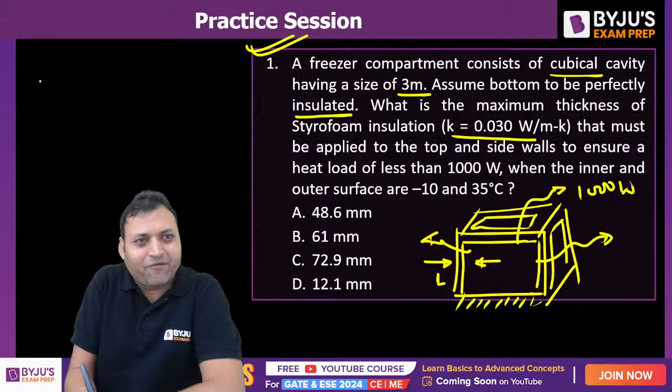The language of the question looks a little complicated, but the actual question is very simple. There is a cubical box, the bottom is insulated. Now we want the side walls to be insulated with styrofoam insulation, so what should be the thickness? Let me call the thickness L, so that the total heat loss should not be more than 1000 watt. If we want Q to be 1000 watt, then thermal conductivity of the insulation into the area available for conduction into delta T.

Delta T is equal to 35 minus (-10). Do not subtract 10 from 35 directly—it will be 35 minus minus 10, because the inner temperature is minus 10. So 1000 will be equal to thermal conductivity 0.03 into 5 into 3 square, do you agree? And 35 plus 10, that is 45, divided by L.

So we can find out the thickness. The only unknown is L. What is the answer? It comes to 60.75, so the right answer for this one is 61 mm.

Well done, Free Fire, Renil. Good, good, good, Bhavya, Kiran. Well done, guys, the answer to the first question is option B. Is this clear to all of you, those who have not responded through the comment section? I hope it is clear to everyone.

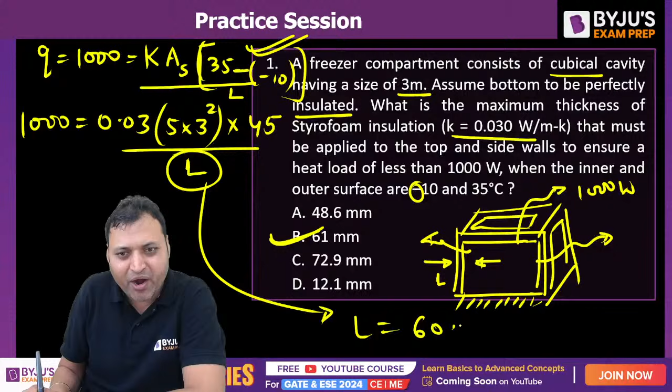The mode of heat transfer will be conduction. Only 5 faces are available for conduction, that is why the total area available for conduction is 5 multiplied by the side square, into the temperature difference between inside and outside, divided by the thickness of each wall, that is L. So L will come out to be 60.75 millimeters, and the correct answer or nearest option is option B.

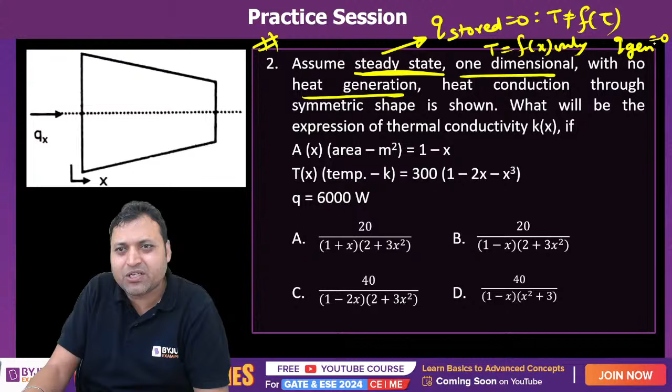When there is no heat generation and no heat storage, the rate of heat transfer remains constant. Heat conduction through the symmetrical shape is shown, so Qx will be constant. Do you agree? It will be constant because there is neither heat generation nor heat storage.

So what will be the expression of thermal conductivity? K will be a function of X. What will be the expression of thermal conductivity if the area, in meter square, is given by 1 minus X, and the temperature variation with X is given by this expression? The variation of temperature with X is cubic, and the variation of area is linear. So what will be the variation of thermal conductivity along the X direction? What is the answer to question number 2?

Can you solve it? One thing is pretty clear: the rate of heat transfer will remain constant using the energy conservation equation. Q in plus Q generated equals Q out plus Q stored. That is the basic energy conservation. If Q stored is 0 and Q generation is 0, then Q in equals Q out. The rate of heat transfer remains constant.

So Q is equal to minus K, which is a function of X, into A, which is a function of X, into dt by dx. Temperature is also a function of X. So first try to find out dt by dx. Can we find out dt by dx from here?

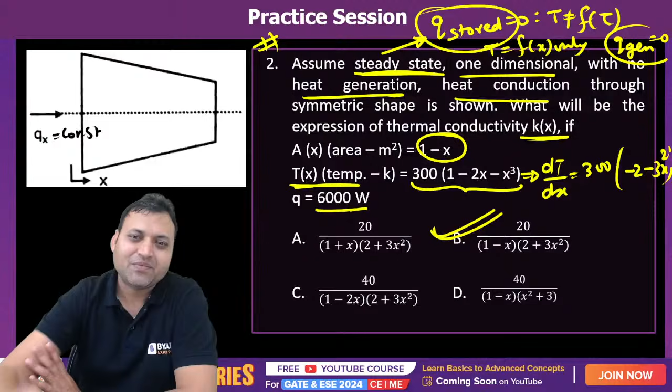How many of you had given the right answer? Yes, did you get it? Kenil, Free Fire, Kiran - good, good, good, good. Anybody having any doubt? Just let me know.

The first step is to understand that the rate of heat transfer will remain constant. Second is to apply Fourier's law. If we apply Fourier's law, then we can find out the expression for K.

Question number 3 and 4 are common data questions. Let us move to question number 3. At steady state, again, heat stored will be 0. Temperature distribution in a one-dimensional wall of thermal conductivity 50 watt per meter Kelvin and thickness 50 mm is observed. The temperature profile is parabolic in this case because of heat generation. Whenever there is heat generation in a plane wall, the temperature profile will be parabolic. If there is no heat generation and no heat stored, the temperature profile will be linear, but due to heat generation it becomes parabolic.

What is the meaning of heat generation? Any other form of energy getting converted into heat energy - that is heat generation. For example, chemical energy due to a chemical reaction can convert into heat energy, or due to nuclear reaction, nuclear energy gets converted into heat energy. In an electrical heater, electrical energy also gets converted into heat energy. These are some examples of heat generation.

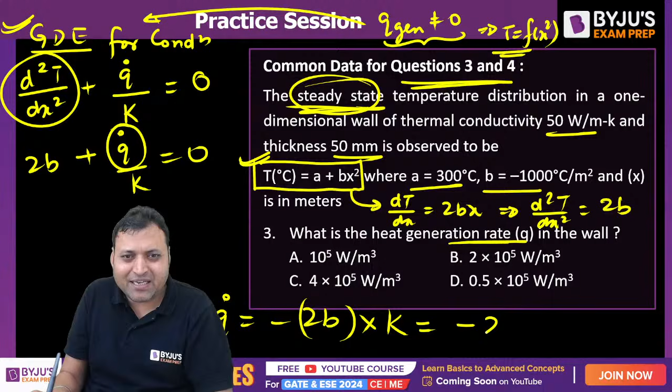B is equal to minus 1000 degrees Celsius per meter square multiplied by the thermal conductivity, that is 50 watt per meter Kelvin or per meter degree Celsius, one and the same thing. Either you write per meter Kelvin or per meter degree Celsius, it will be the same thing.

So the degree Celsius will be getting cancelled out with the degree Celsius. So watt per meter cube, it will be 50 into 2000, 100 into 1000. 100 into 1000, 10 to the power 5.

Yes, no one? Parth, well done. Shekhar, free fire. It is 10 to the power 5 watt per meter cube. Do you know, either we write the unit of thermal conductivity in watt per meter Kelvin or watt per meter degree Celsius, it will not make any difference.

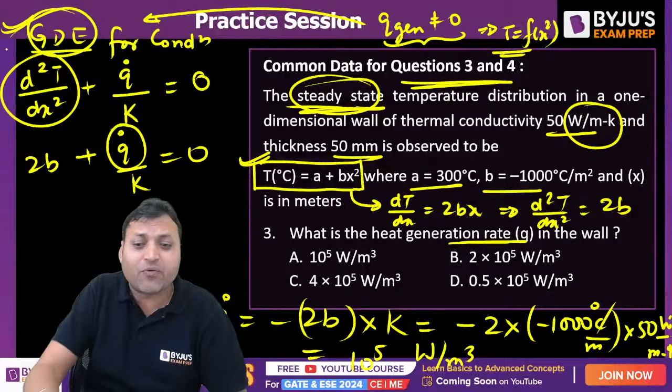Why have we used the governing differential equation here, and why had we utilized the Fourier law earlier? Do you know the difference? Whenever the heat transfer rate is constant, we can always analyze the system using the Fourier law.

But if the heat transfer rate is not constant, if it is variable, that will happen because of the generation of heat or the storage of heat or both. Then we should start our analysis with the governing differential equation for conduction, which is obtained by applying energy conservation for the system. I hope this is all clear to everyone.

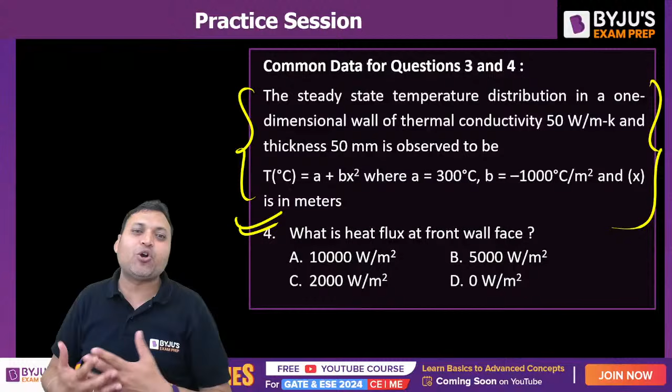Let us move to question number 4 using the same data. Can you find out the answer? Those who are not responding, let me tell you, learning cannot be done without mistakes and errors. So you should be ready to accept your mistakes and keep improving them. Committing the mistake is the first step towards improvement. So even if you are not getting the right answer, do not hide it.

Even if you are committing a mistake, you should accept it and try to improve. So what is the heat flux at the front wall face? What is the meaning of front wall face? At x is equal to 0. What is the heat flux? Q dash at x is equal to 0.

That is Q by A, which is equal to minus K into area. It will not be area because we are talking about heat flux, minus K into dt by dx at x is equal to 0. That is the heat flux.

What is the value of dt by dx? I have already discussed dt by dx. It will be equal to 2bx, and at x is equal to 0, dt by dx will become 0. So q dash at x is equal to 0 will be 0.

How will the temperature profile be drawn then? If you see the temperature profile, as temperature increases, as x increases, dt by dx will also increase, but with negative sign. So if I ask you to draw the temperature profile, what is dt by dx? It is 2bx. As x increases, dt by dx will also increase, and the sign is negative, because b is negative.

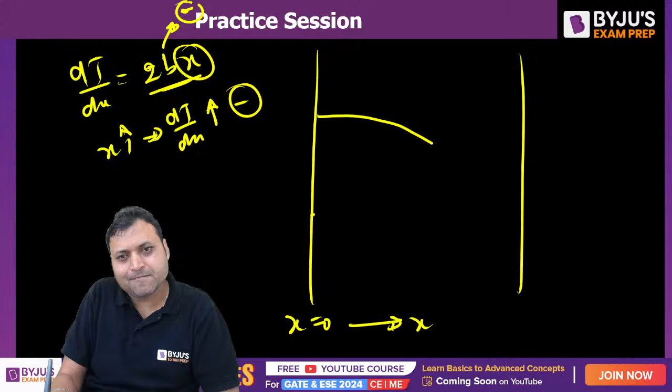B is negative, so the dt by dx will be 0 here. This is x is equal to 0. This is the direction of heat flow. So it will be like this. This is how the temperature profile will be.

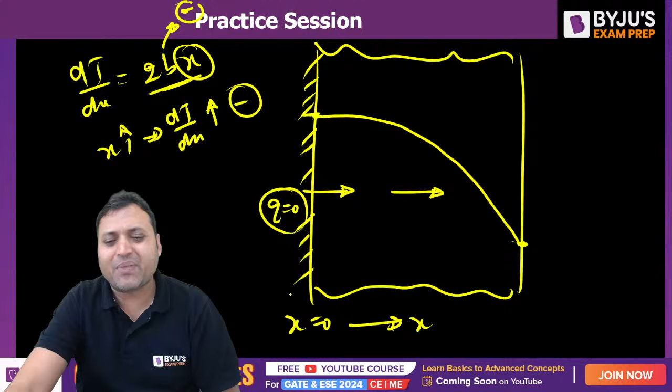So heat will flow from this to this - that is the direction of heat flow. Q is equal to 0 here, it is insulated, we can call it insulated. This is how the temperature profile will look like. So the answer to this question is option D. D is the correct answer.

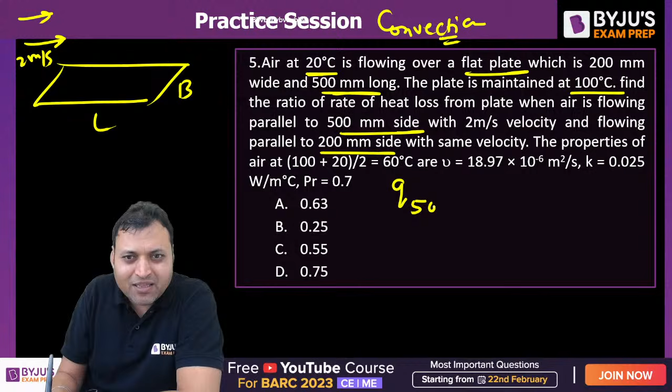Air at 20 degrees Celsius is flowing over a flat plate which is 200 mm wide and 500 mm long. The length of the plate is 500 millimeter and the width of the plate is 200 mm. The plate is maintained at 100 degrees Celsius, that is the surface temperature. Find the ratio of heat loss from the plate when the air is flowing parallel to the 500 millimeter side with 2 meter per second, and flowing parallel to the 200 mm side with the same velocity.

So we need to find out the ratio of heat transfer rate when the flow is along the 500 mm side to the heat transfer rate when the flow is along the 200 millimeter side. It is the length which is going to change, so our objective is to find out the relation between Q and L. If the length is 500 mm, the rate of heat transfer will be different; if the length is 200 mm, it will be different. The rate of heat transfer is from the surface to the fluid - that is the direction of Q.

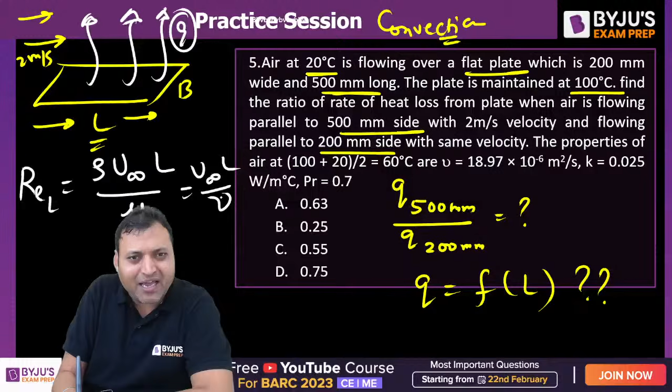So whenever we need to develop a relation between any two parameters in convection, first we need to understand whether the boundary layer developed is laminar or turbulent over the flat plate. That is given by rho into U infinity into L by mu, or U infinity L by kinematic viscosity. Let's find out the Reynolds number.

So that is 2 into 500 into 10 to the power minus 3, upon kinematic viscosity which is 18.97 into 10 to the power minus 6. Put the value in SI units. So Reynolds number at the trailing edge comes out to be 5.27 into 10 to the power 4.

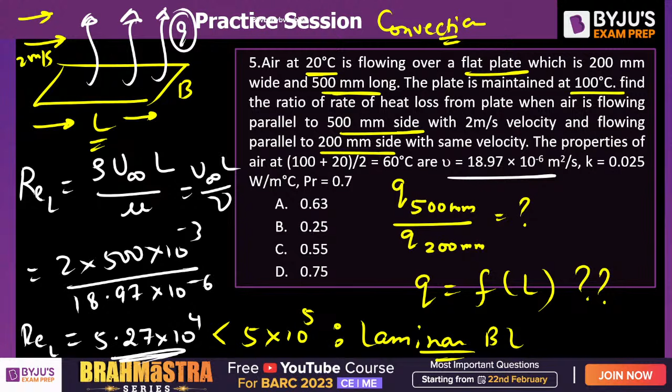Because for laminar boundary layer the expression will be different, and for turbulent boundary layer the expression will be different. Can you let me know whether the boundary layer is laminar or turbulent? Because the Reynolds number is coming out to 5.27 into 10 to the power 4, which is less than 5 into 10 to the power 5. So definitely the boundary layer is laminar. If anybody had solved it, please let me know the answer.

So the boundary layer is laminar, and for laminar boundary layer, Nusselt number, that is H into L by Kf, is directly proportional to Reynolds number to the power 1 by 2 into Prandtl number to the power 1 by 3. If it would have been turbulent boundary layer, then Reynolds number to the power 4 by 5 would have been correct. So we can say Kf is constant - we need to develop a relation between H and L. So H into L is proportional to L to the power 1 by 2, or H is proportional to L to the power minus 1 by 2.

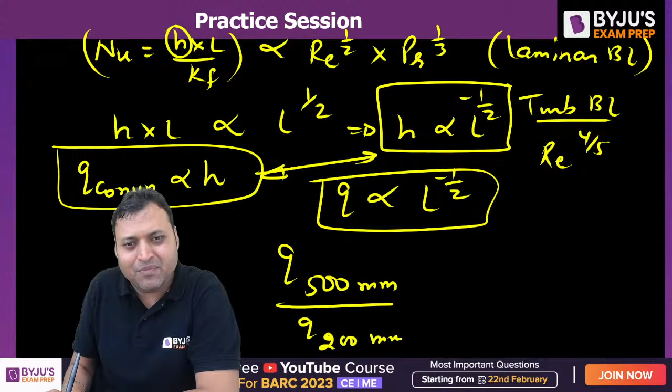The convective heat transfer coefficient is proportional to L to the power minus 1 by 2, and Q convection is proportional to H. So from these two expressions, Q is proportional to L to the power minus 1 by 2. So Q along 500 mm divided by Q along 200 mm is equal to under root of 200 mm by 500 mm. This will be the ratio: under root of 2 by 5, which comes out to 0.63. 0.63 will be the answer.

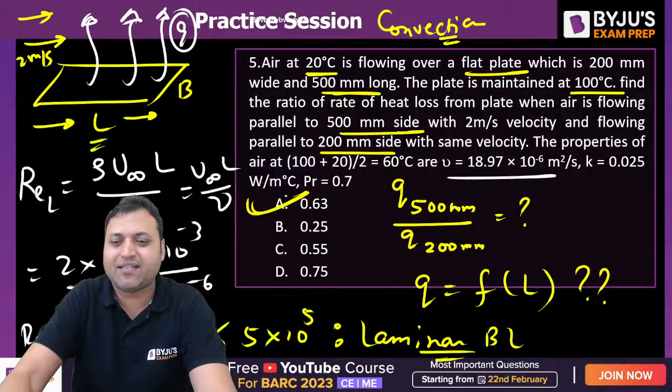So the answer to this question is 0.63. 0.63 will be the correct answer. All right, so let us move to the next part.

Next question, question number 6 and 7. Again, one of the wonderful questions. These type of concepts are frequently asked from convection in your competitive examination. If the previous question would have been from the turbulent boundary layer, then H would have been proportional to L to the power minus 1 by 5, and Q would have been proportional to L to the power minus 1 by 5. The results would have changed, right?

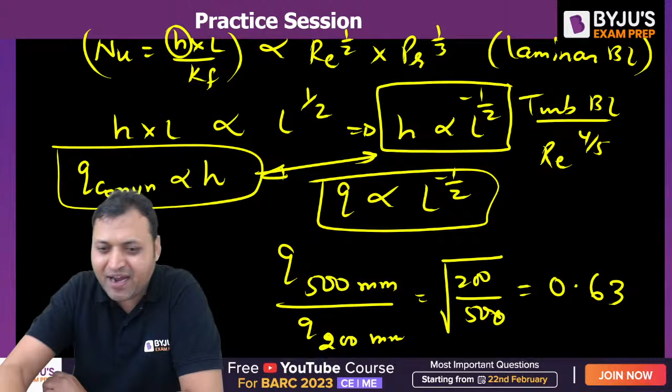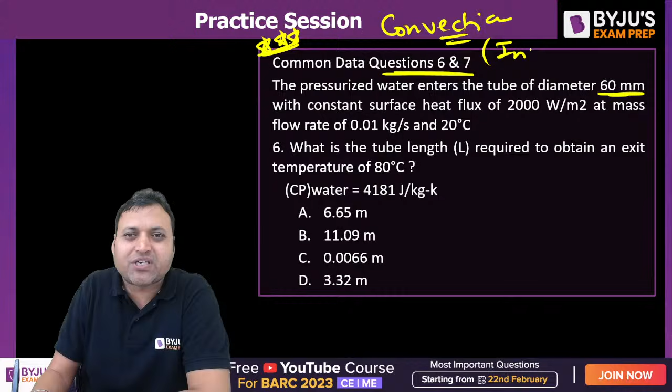So the next question, 6 and 7, read the question. Pressurized water enters the tube of diameter 60 mm. It is internal flow; the previous question was for external flow, boundary layer theory. This is for internal flow. The water enters the tube of diameter 60 mm with constant heat flux of 2000 watt per meter square at mass flow rate of 0.01 kg per second at 20 degrees Celsius. So the entry temperature, the bulk mean temperature at inlet, is 20 degrees Celsius. What should be the length of the tube required to obtain an exit temperature of 80 degrees Celsius?

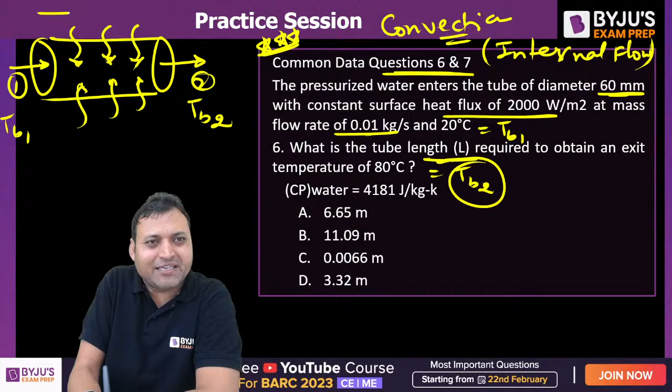If we want TB2 to be 80 degrees Celsius, it is basically from the energy conservation equation. Heat is entering from the periphery in the radial direction, fluid is flowing in the axial direction. This is section 1, this is section 2. The temperature of the fluid here is TB1, the temperature of the fluid here is TB2. We need to find out the length of the tube. So according to energy conservation, if there is no other energy loss from the system, then whatever heat is added to the fluid will increase the internal energy of the fluid.

So we can say Q dash into pi d L, because the heat is entering through the periphery, and the area of the periphery is pi d L, is equal to mass flow rate of the water into specific heat of water, that is also given, into TB2 minus TB1. So if you put the values here, Q dash is given as 2000. Put all parameters in their SI unit. Pi into diameter of the tube, which is 60 mm, so 0.06 into L, which is unknown.

Why am I writing the mass flow rate? Because the heat flow rate is in joule per second, that is why we need to take the mass flow rate 0.01 into 4181 into TB2 minus TB1. What is TB2 minus TB1? 80 minus 20, that is 60. The only unknown is L, which should be the length, and it comes out to 6.65 meter.

Are you guys getting 6.65? Bhavya, well done. Others, please do the calculation on your own and tell me if you are getting 6.65 meter or not. Question number 6, the answer is option A. Yes, Patel ji, well done, keep it up.

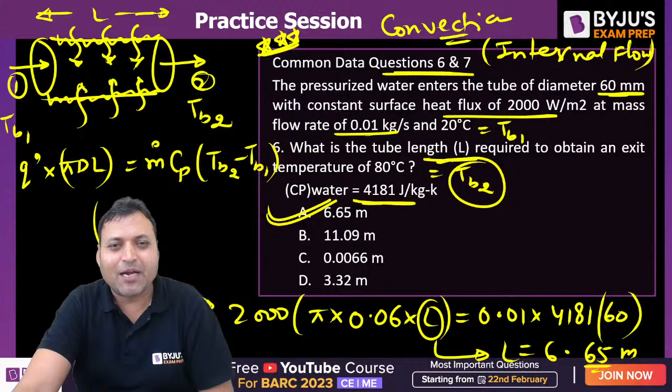Can we proceed further?

Question number 7, using the same data. What is the surface temperature at the outlet of the tube? You must have seen these kind of questions in your previous GATE papers. Sometimes the same concept gets repeated in other examinations like BARC, because the pattern of the BARC exam and GATE exam is more or less similar. So you can find previous year GATE questions appearing in the BARC exam as well. That is why I brought this question. This is not a GATE previous year question, but the concept gets repeated.

What is the surface temperature at the outlet of the tube, that is TS2, where the local convective coefficient at the tube outlet is 48.7 watt per meter square Kelvin? So if we see the outlet, the mode of heat transfer is convection. So Q dash, which is the heat flux at outlet, equals H2, where 2 is for outlet, into delta T, that is TS2 minus TB2. That is the mode of heat transfer, convection.

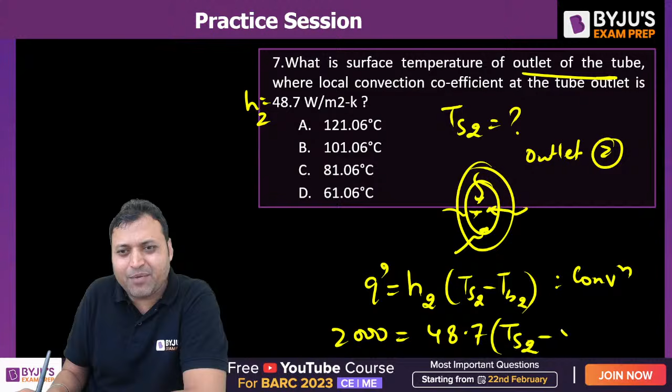So Q dash is already known to us, 2000. H2 is 48.7. TS2 is unknown, minus TB2 is 80. TS2 is unknown and TB2 is 80. Question number 7, simple question, yet conceptual.

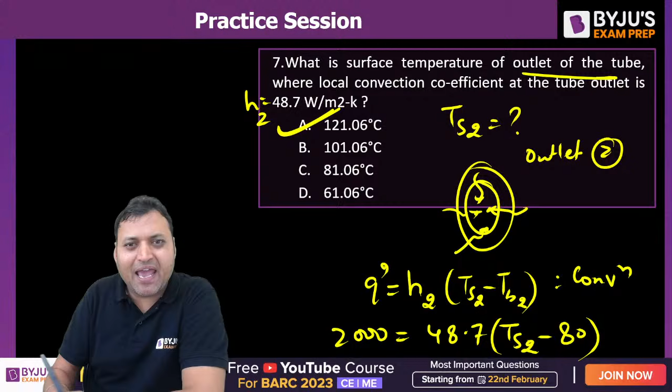Can you find out the value of TS2? Option A is the right answer. Here the question is not about the inlet, the question is about the outlet.

They could have asked you the value of TS1 also. For TS1, Q dash is equal to H1 into TS1 minus TB1. Q dash will be constant. H1 should have been given. Here the local convective coefficient at outlet is given. But if they give you the local convective coefficient at inlet, then we should have used this expression.

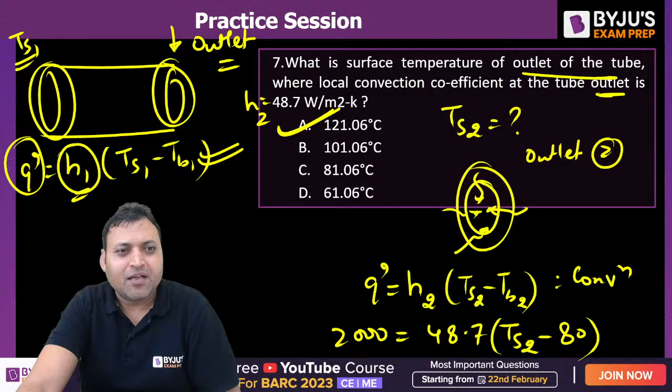So option A is the correct answer for question number 7.

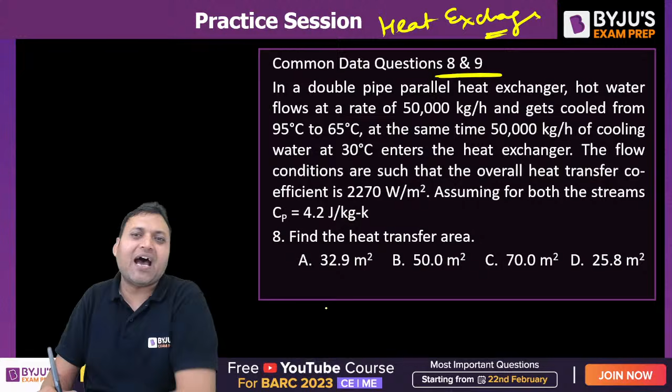Question number 8 and 9 are from the heat exchanger. Read the question and try to get the correct answer. In a double pipe parallel flow heat exchanger, the term parallel is important.

Hot water flows at the rate of 50,000 kg per hour. The unit is not kg per second, it is kg per hour, and gets cooled from 95 degrees Celsius to 65 degrees Celsius. The hot fluid is water.

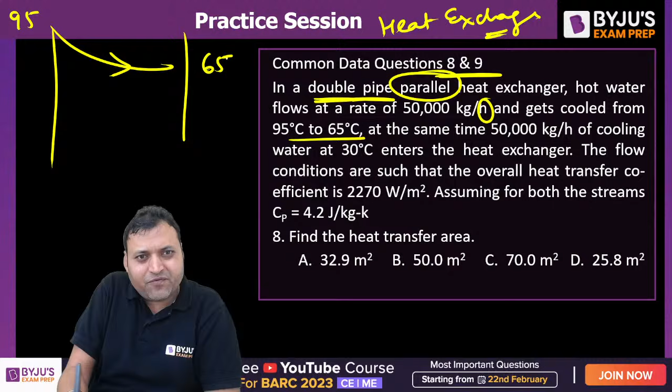95 to 65, right? At the same time, the same mass flow rate of cooling water, the cold fluid is also water, at 30 degrees Celsius enter the heat exchanger. This is at 30 degrees Celsius.

Because the fluids are water, hot fluid and cold fluid are water, and the mass flow rates are same, so we can say heat capacity rate of the hot fluid is equal to heat capacity rate of the cold fluid. Mass flow rate is same, specific heat is also same, so the product of mass flow rate and specific heat will be same for hot fluid as well as the cold fluid.

The flow conditions are such that the overall heat transfer coefficient, that is U, is given as 2270 watt per meter square. Kelvin is missing. Assuming for both the streams Cp is 4.2, what is the area of the heat transfer?

What is the area of the heat transfer? The question is to find out the area. So can we first find out the outlet temperature of the cold fluid?

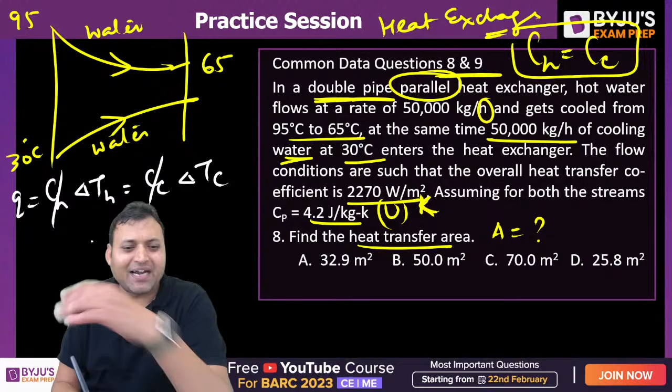From the energy equation, Q is equal to CH into delta TH is equal to CC into delta TC. Isn't it? Can we? CH is equal to CC. So delta TH will be equal to delta TC, isn't it?

So what is delta TH? 95 minus 65 must be equal to TC2 minus 30. So what is the value of TC2? Isn't it 60? What is the value of TC2?

60 degrees Celsius. So once we know all the terminal temperatures, 4.2 kilojoule, yes, it must be in kilojoule per kg Kelvin. You all know the specific heat of water, 4200 joule per kg Kelvin. Cp must be in kilojoule per kg Kelvin, and this overall heat transfer coefficient should be in watt per meter square Kelvin.

There are some typing errors. So can you find out the LMTD, mean temperature difference, for the parallel flow heat exchanger? It will be 95 minus 30 minus 65 minus 60, upon natural log of 95 minus 30 upon 65 minus 60. Isn't it?

So what is LMTD? What is the value of LMTD? First of all, find out the LMTD. Did you get the value of LMTD? LMTD will be coming out to be 23.39 degrees Celsius. How many of you are getting LMTD to be 23.39?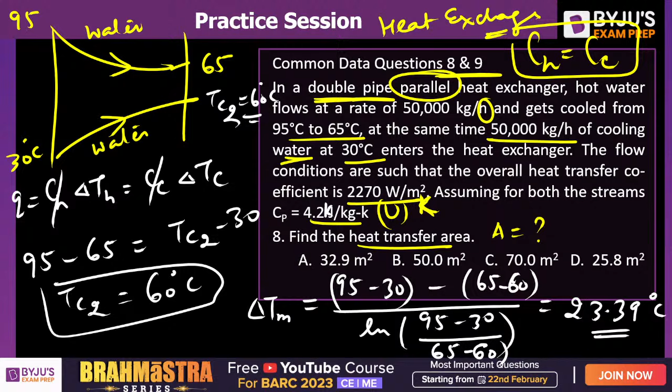And once you get LMTD, then the rate of heat transfer, let me add one more blank slide to it. Once you get the LMTD, then you can apply the energy conservation equation, Q is equal to U into A into LMTD. Then you will get the answer for the area, right?

Can you solve it? Yes. Now, Q, that is CH into delta TH, is equal to U into A into delta TM, mean temperature difference.

CH is 50,000 by 3600 into 4200 into delta TH. What is delta TH? 95 minus 65. This is equal to U, overall heat transfer coefficient, 2270 into area into 23.39.

23.39. The value of area can be calculated. What will be the value of area? Are you getting 32.9 meter square something? Are you guys getting 32.9? Yes, Anand, Free Fire, Parth, Novan, Bhavya, well done. 32.9, A is the correct answer for this one.

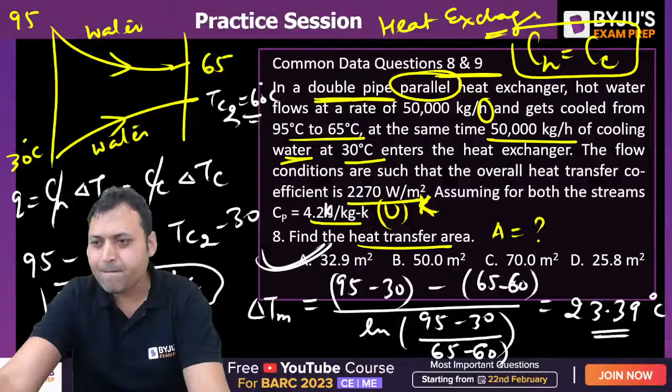A will be the right answer. A will be the correct answer.

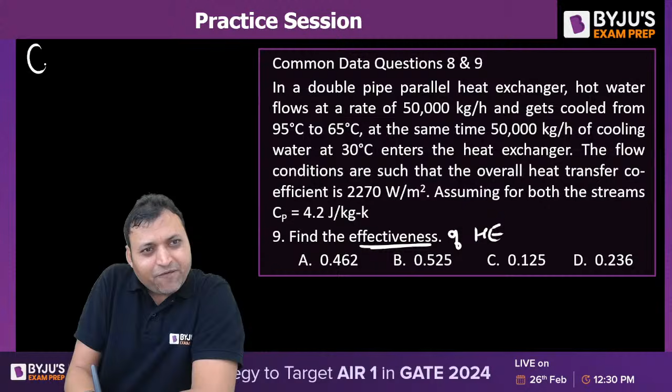Let us move to the next one. The same information will be used to find out the effectiveness of the heat exchanger. Can you find out the effectiveness? So effectiveness is equal to actual heat transfer rate to the maximum possible heat transfer rate.

So effectiveness is equal to CH into delta TH, that is the actual, and here it will be C minimum into TH1 minus TC1, isn't it? CH and C minimum getting cancelled out because CH is equal to CC, that is C minimum, the minimum heat capacity rate. So effectiveness will be equal to, using the formula, delta TH 95 minus 65, TH1 that is 95 minus TC1 that is 30, isn't it?

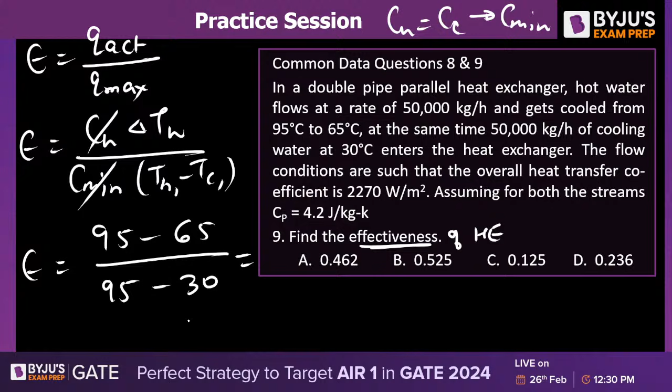So what will be the effectiveness of this heat exchanger? The effectiveness will come out to be 30 upon 65.

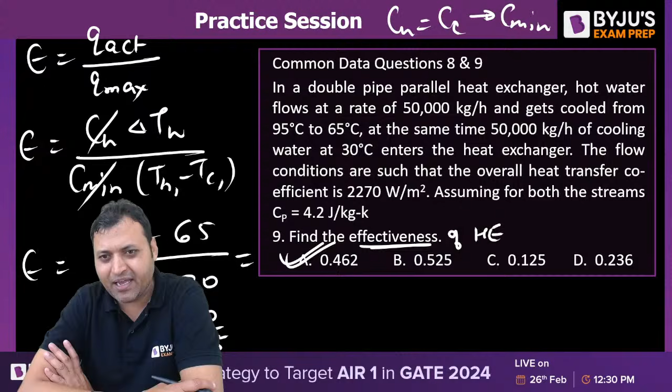It is slightly less than 0.5. Option A, it is slightly less than 0.5. 30 upon 60 is 0.5, so it is less than 0.5. That is option A. Option A is the right answer, no need to calculate it. 0.462, yes.

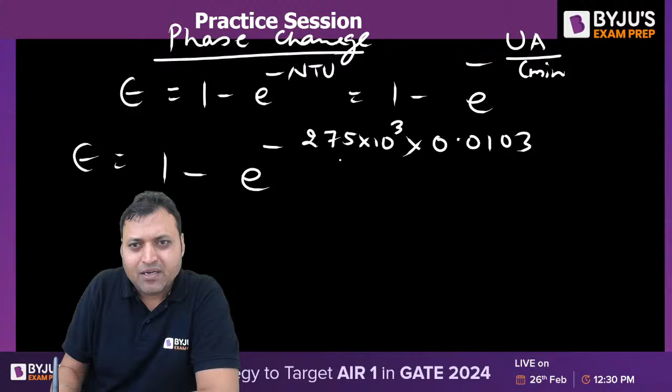C minimum will be this gas only, because for the other fluid, C is infinite when it is undergoing a phase change. So C minimum will be equal to the mass flow rate, that is 1.5 kg per second, into specific heat, that is 2000. This will give you the answer.

What is the effectiveness? Effectiveness is given by... what is the answer to this one?

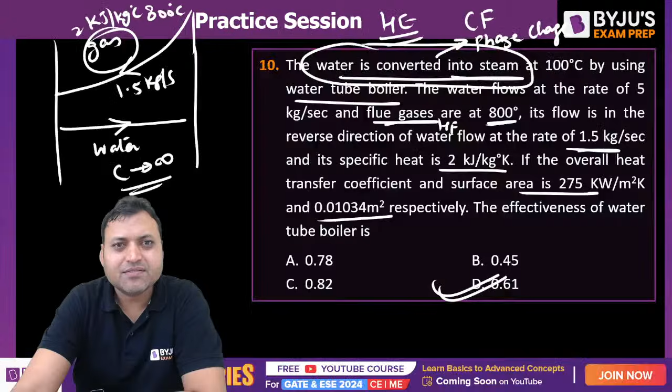D is the answer for this one. Whenever there is a phase change, the effectiveness formula is given by this expression, 1 minus e to the power minus NTU. And NTU is given by UA by C minimum. This is the formula for NTU, number of transfer units, which gives us information about the size of the heat exchanger.

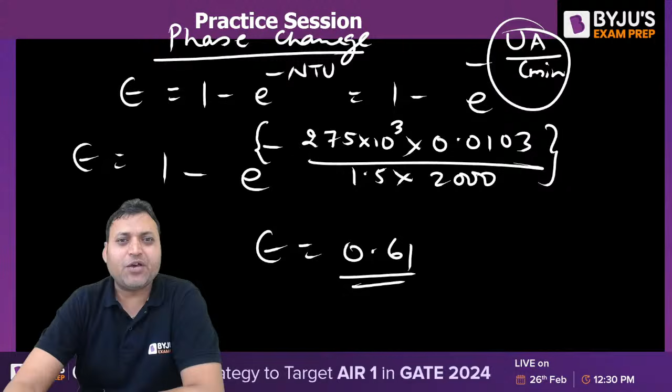The next question, question number 11, from the radiation shape factor. Very, very important question, very important concept. In radiation, there are two concepts which are very important: one is the shape factor, another is the analysis of radiation.

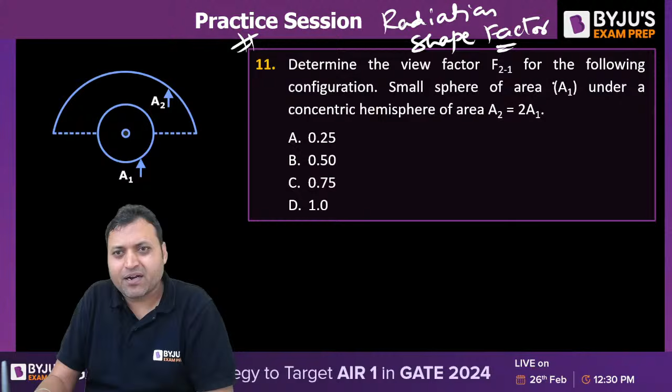Radiation analysis: determine the view factor F2 to 1. A2 is this, A1 is the sphere. For the following configuration, small sphere of area A1, that is surface 1, which is insulated from inside, under a concentric hemisphere of area A2. A2 is insulated from outside. So we need to find the shape factor from 2 to 1 when the area of the hemisphere is twice the area of sphere 1.

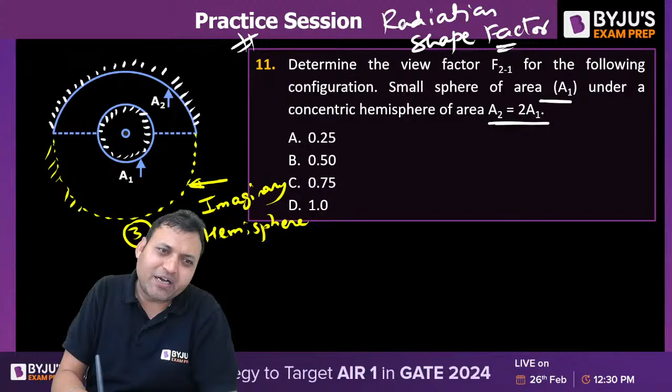Now what we can do is make an imaginary hemisphere. Let us say this is an imaginary hemisphere, surface 3. Surface 3 is an imaginary hemisphere of the same area A2, that is also insulated from outside. 3 is an imaginary hemisphere. So what we can say is that 1, 2, 3 makes an enclosure.

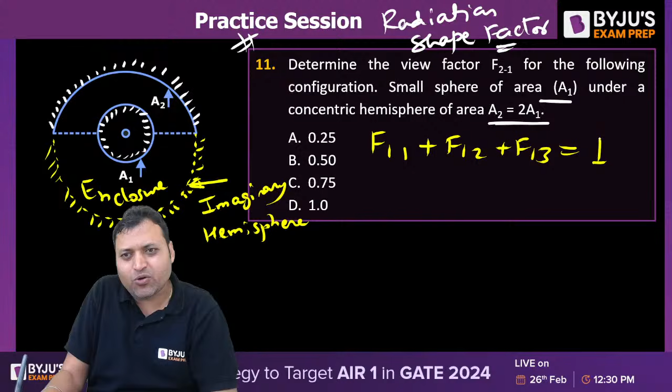Using the enclosure theorem, F11 plus F12 plus F13 is equal to 1. That is the enclosure theorem. And the self shape factor of a convex surface 1 is equal to 0. The self shape factor of convex surface 1 is equal to 0, isn't it? And from the symmetry, 1 is symmetrical to 2 as well as 3.

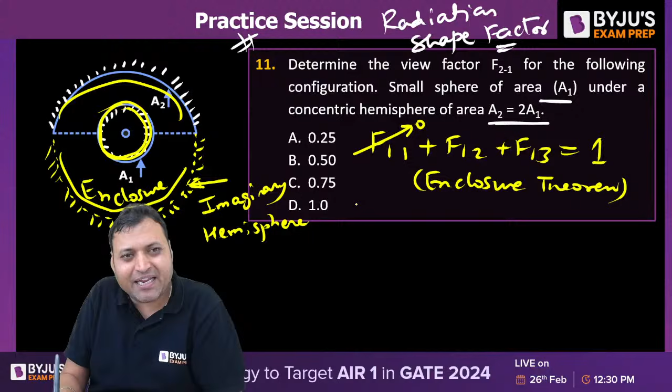So from the symmetry, can we say F1 to 2 is equal to F1 to 3? That is equal to 0.5. That is the symmetry principle. Using the symmetry principle, the radiation from 1 to 2 will be same as the radiation from 1 to 3. So F1 to 2 is equal to F1 to 3, and the sum is equal to 1. So 0.5 will be each.

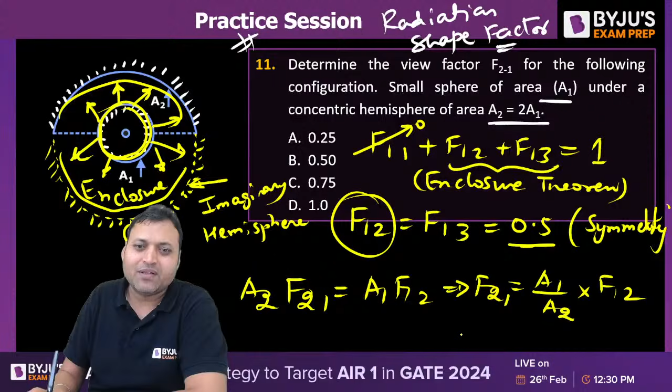Now the question is not about F1 to 2, the question is about F2 to 1. For F2 to 1, we can say A2 F2 to 1 is equal to A1 F1 to 2. So F2 to 1 is equal to A1 by A2 into F1 to 2. So F2 to 1 is our parameter to be determined. What is the ratio of A1 by A2? A1 by A2 is 1 by 2, and F1 to 2 is 0.5. So it will be 0.5 by 2, which is 0.25, the correct answer. 0.25 will be the right answer to this question.

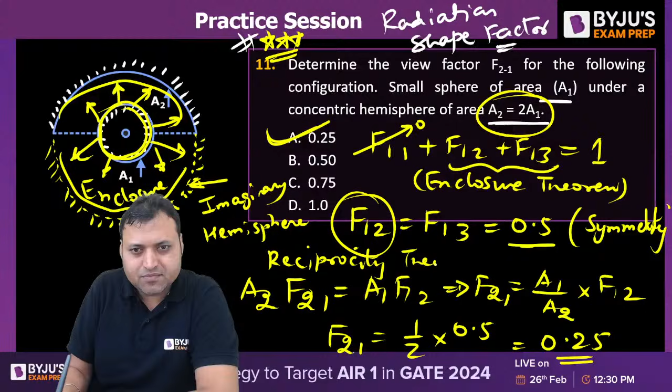Do you get it? Is this clear? Parth, Anand, nobody had given me the correct answer for this question. What happened? You need to draw an imaginary hemisphere to make the system an enclosure. Then we apply the enclosure theorem, symmetry principle, and reciprocity theorem. The question will be solved in 3 steps. Very, very beautiful question. Reciprocity theorem. I hope this is clear.

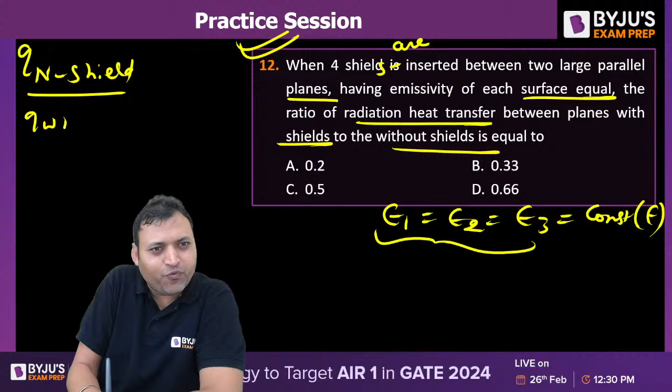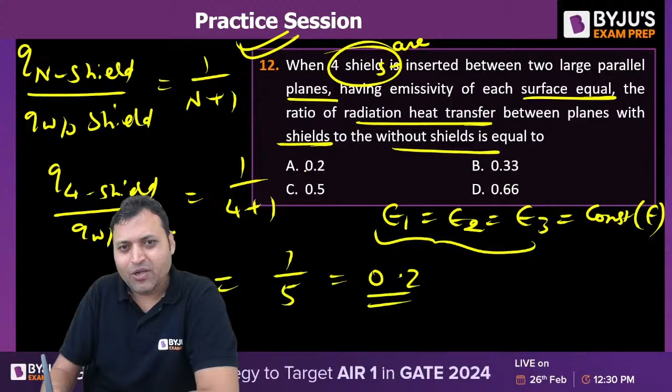Very simple. If the emissivities are same, Q with n shields upon Q without shield is equal to 1 upon n plus 1, isn't it? Because the shields are 4, n is the number of shields. So Q 4 shield divided by Q without shield will be equal to 1 upon 4 plus 1, that is 1 by 5, 0.2 will be the answer. Option A is the correct answer, right?